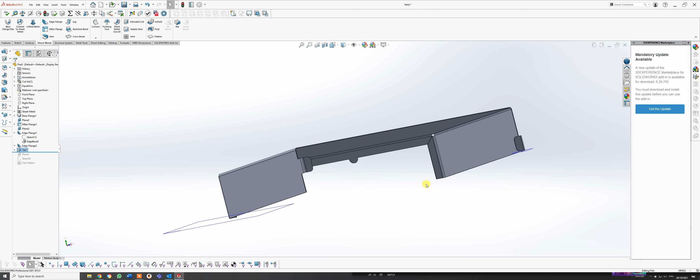Okay, we're going to talk about sheet metal today. What you see in front of you is just a very basic sheet metal process using flanges. Most sheet metal uses flanges. I know that may sound funny, but get used to using the word.

There are four basic flange types within SolidWorks, and they are your base flange, which is what you probably do most of your modelling with, your mitre flange, your edge flange, and your tab, or what we call a boss flange. Boss meaning it just extrudes it into the shape.

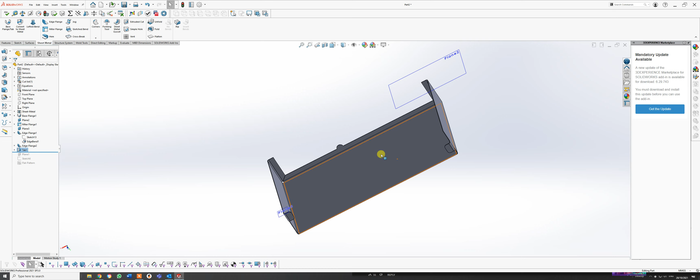So that is basically what we're going to do today. This will probably be one, maybe two exercises, but I'll just zoom in to show you what we've got.

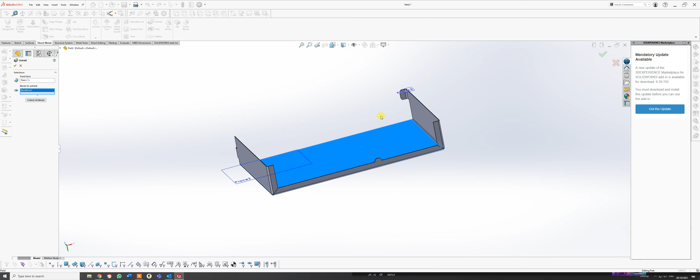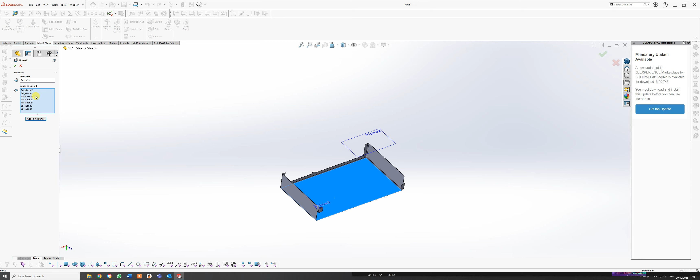I'll just unfold this, and if I just hold the face that I want to do and bends to unfold, click that one, that one, that one, and that one, and this is when it won't do it for me. I'm sure it won't, I'm just clicking all the bends on it. Let's say, I'll show you how to do this in a sec. I'll say collect all bends, and let's see if it does it. There we go, and there's my net that I can.

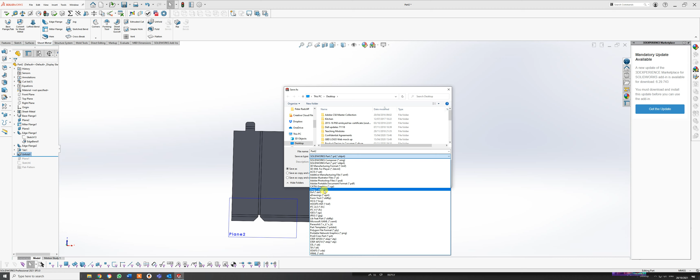As I say, this is in aluminium. I actually use it, or have used it in the past, for doing packaging, and then saving it out as a DXF file. Just go to File, Save As. There we go, onto there. And if I go down to DXF or DWG, I can then bring that in and laser cut it, and I know then that I have a precise net to actually construct it.

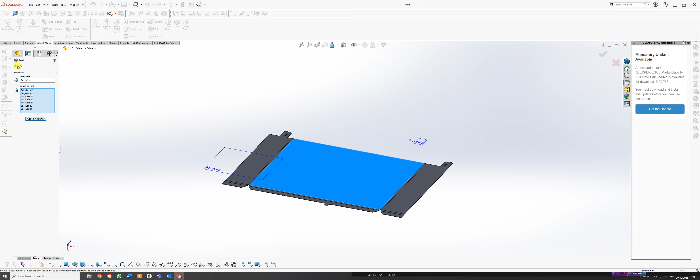And to put it back, if I just go back to fold, and I just say collect all bends, and then give it a tick, it should then fold back up to what I want to do. So sheet metal actually is quite a valuable tool, not just for doing sheet metal, you can do it for packaging as well. Okay, so what I'm going to do for this one is just show you how to do it. And I say this is very basic, and we will evolve this once you've got to grips with it.

I just point out also that you're running a higher version of SolidWorks than I am. You've got the full Monty. I have Professional, which is the next one down, which is more than enough for me. But you do have an unfold button. I think, and somebody can correct me on this, it's under the direct editing module. See, I don't have that there, so I can only use it in sheet metal.

What is interesting is I did do a champagne bottle neck cover for a local champagne producer, and I tried to use SolidWorks to do it, and I could get so far and I could unfold it, but the guys actually ended up doing it in Rhino. Although I don't think Rhino's got the unfold thing. I think in terms of Rhino, they managed to project the curve, etc. But it has its pros and cons, and it should have been able to be done in SolidWorks.

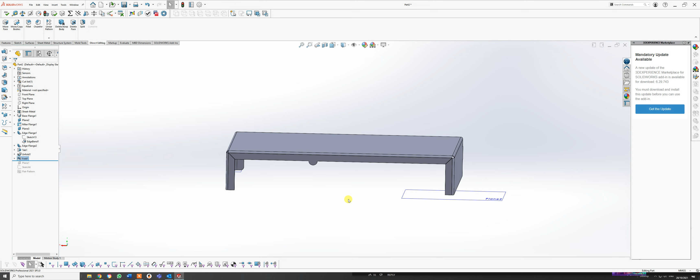But anyway, we'll move on. So to start with, what you need to do is go to File, New. I'll just check I am recording. Yes, I am. Okay, a new part as always.

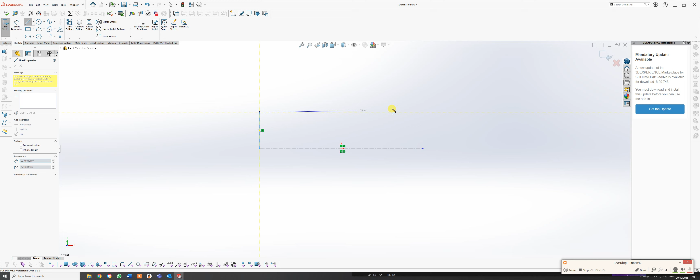I then want to draw a solid line from there up to about there, round to there, and down. Now you could do that with a rectangle tool, it's just really what floats your boat in that way. So smart dimension on here, go up to 420, okay, and the side ones at 76 in height. Okay, now let's come out of that sketch for a moment.

Or I could go straight into... what are we doing today? We're doing sheet metal, yeah, the sheet metal tab.

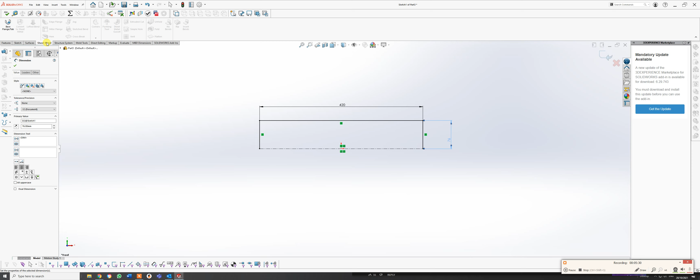And I could go to base flange, and it goes through and automatically selects the sketch that I've got, so I'm still in that sketch. Now, what's interesting here is it's gone with the parameters I've been using previously.

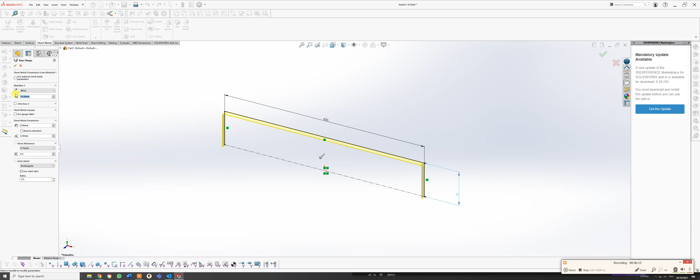But just to double check that, you need to make sure that your boxes are correct. SolidWorks has also updated a lot since I started, so some of these new bits and pieces are new to me. So with your direction 1, it needs to be blind, and you need to put a figure in there of 240 millimeters.

And you want to double check that you are using sheet metal gauge. So just click on that one there and select the table, and you want sample aluminium. Now, gauge, the thickness of metal, is measured by gauge. The higher the number, the thinner the sheet. So on that, it's default to gauge 10. You want gauge 20, and I'll give you a sheet or a table that actually equates to that, and you can preload tables for SolidWorks.

And if you ask Mark, he should hopefully go through gauges with you on that. I tend to use this, as I said before, for packaging. And that thickness of card is not in gauges, it's in GSM. But if you've got the table, you can then actually simulate the two from that.

Just to quickly go down on that, these radius here should be 3 millimeters. So you just want to change that one there to 3.

And K factor, bend allowance, it's a mathematical calculation that allows you to calculate the bend aspect. Or you can, if you take on that, you might be given a bend allowance, bend deduction, or bend calculation. But K factor is fine just for this, for the meantime. And just make sure that bend allowance is grayed out for you.

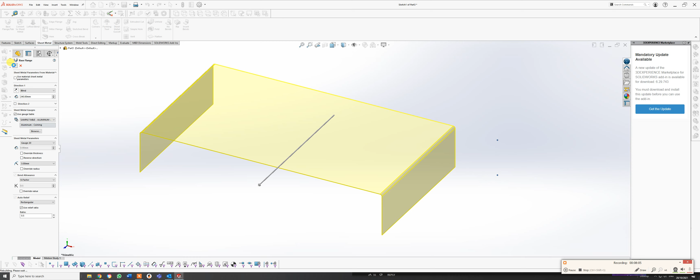So I'm going to give that a tick, because we've actually completed that, and I will then go on to, you'll see the part arrive. So that's basic sheet metal, and I've got two base flanges formed on the ends. Now what I want to do now is actually add in some flanges on these sides.

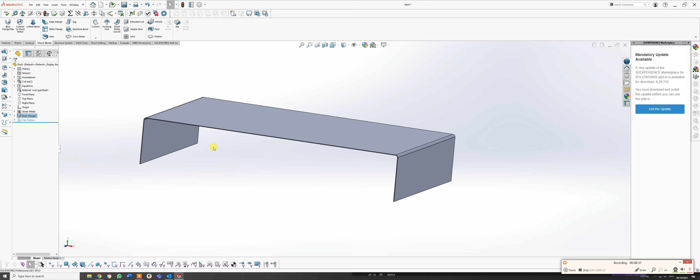Now it's quite interesting, there are different types of flanges, as I've said, but there's also different types of relief that you can have, and we've got automatic relief set up at the moment, so just leave it at that for the time being. So if you turn over

there to get into that position, and then just zoom right in to this edge here. So rather than going to sketch this time, the shortcut to do this, we go to insert, come down to sketch, okay, and then click on that line there, and you'll notice that your UCS has changed.

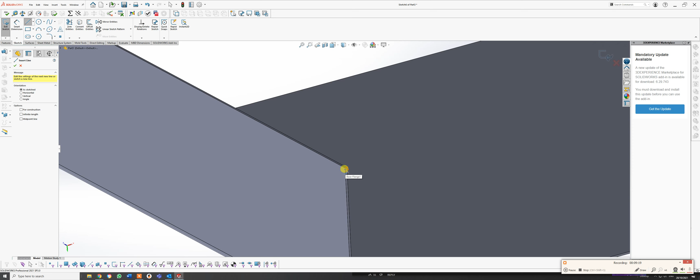So actually you're drawing in that plane there, but it's recognized it's sheet metal from those parameters. So I'm going to put in a sketch line along there, if I can find, where are we, there we are, and then let's have that at 16 millimeters, and you notice it's already defined itself apart from its length. So do that 16.

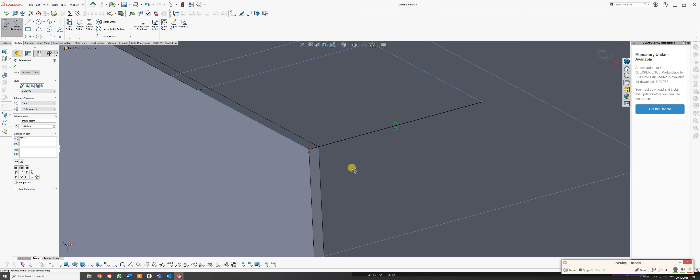Now it's important that that is on the outside, you'll see why in a second, and not on that inside area there, although you can change it about, as I'll show you. So now we've got that there, and that's at 16 mils, and it's on the outside of that vertex.

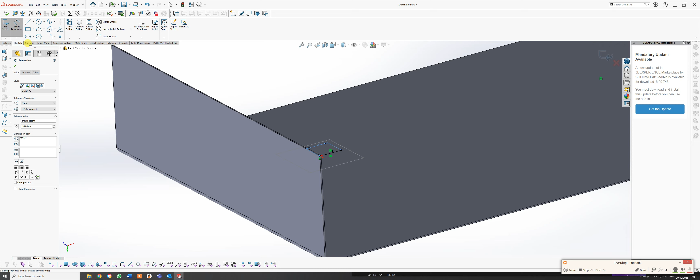Now we now want to put in what we call a mitre flange. So you can either go to insert sheet metal again, or go to sheet metal, and you'll see the highlight there, mitre flange. SolidWorks is brilliant because you just hover over and it tells you what you're going to do really. And look, automatically it's already sort of put in the flange distance there for me, and it's gone to my sort of default.

But I want to pick up some other edges and make sure that everything is correct. So flange position, this is what I said, it's important that you pick the right line, but you can change it. That's on the inside of the line we've drawn. If I had drawn it on the other one, I could have gone there, and that then goes on the outside, and then that comes inbound. So it's just important that you make sure it is in the right area.

The one thing we are doing here is actually using gauge tables, so just take that out, use gauge tables of 3mm, and start end offsets 0.

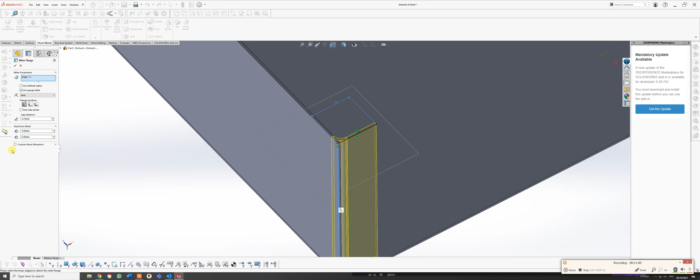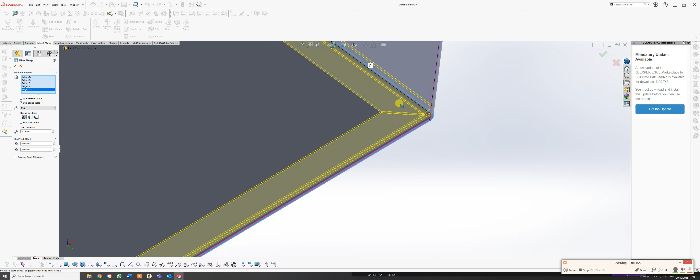What I want to do now is go and pick the other areas that I want the flange to look at, so make sure you've got the same figures as I have in that table. I'm going to pick on that line there, and automatically it has started to pick up on the flange details that I've got there. Also notice that has actually gone inbound.

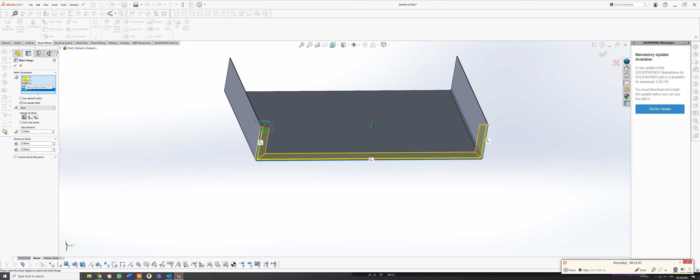I'm just double checking I've got the right one. So it's come inbound, so it's actually bent that in to those points there, as you can see. What I'm going to do now is, well, let me just come out of this and double check that we've got this.

If you look at your design tree, you'll see you've actually got what they call a cut list on there. These are different things that anyone who actually makes this knows the sort of direction and what is involved for you doing what you're doing.

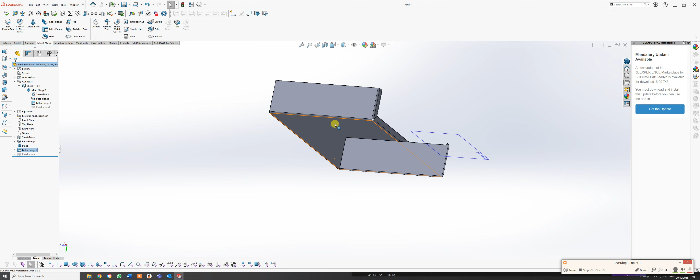What I'm going to add now is on this side, I'm going to put in an edge flange, and that's different from the mitre flange on there. So if I go up to my sheet metal tools, I go to edge flange, and it's already asking me to pick an edge. I'm going to pick that out there, and you notice straight away it's put it in, but it's going in the wrong direction.

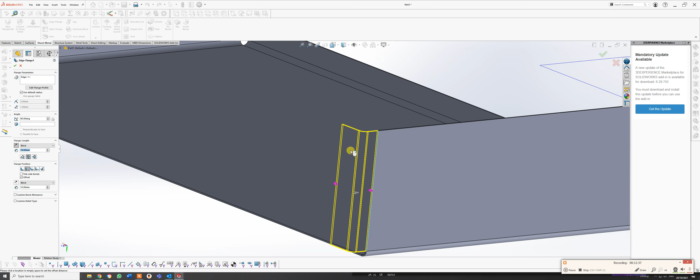So I just take that over there, and I'm going to put that in somewhere probably about 20mm, just a click, so I've actually got what I want to look at. Okay, I've actually done this on the wrong side, but it doesn't really matter for now because this is a demo.

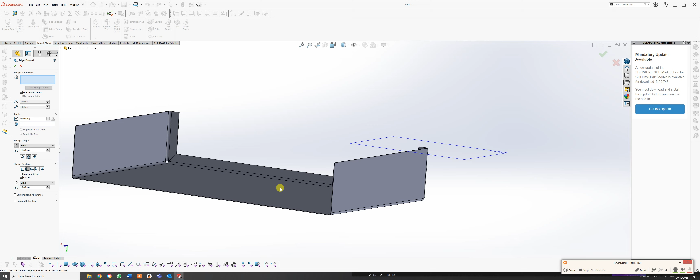I should have that on that side, but I could actually change this. So I just clear selection on that, and I go to the side I want, because I should be looking at that in that orientation. Let's just go in. I probably had it on the right one. There we go. And again, like I said, I can pick that up, take it away, or pull it where I want to. For the moment, I want that to be round about 20.

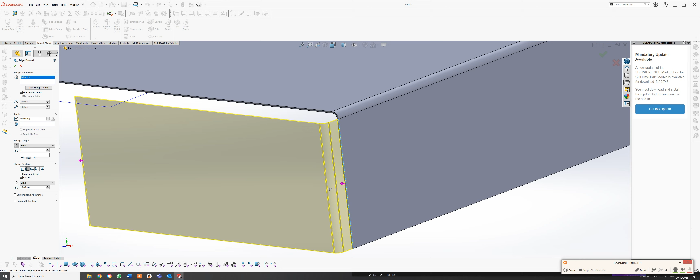Okay, I want it blind, and down here the parameters for the flange length actually will be 30 at the end of the day. So just put in 30, save time later on. And what you'll notice here this time, I've actually got the flange outside and not inside.

So if I click that, see how it goes? Well, it doesn't really go in. It's probably because we have that there position. I'm just wondering if I should actually change that. That's fair, let's just see if I can. No, I'm going to leave that. It's 10mm out, which is a little bit too much.

That's that 10mm there. Let's just see if I put in 0, see what happens. So yes, it comes inboard then. And if I just change that to there, that goes outside, so it goes back to my 10 on that. I want that there for now. It doesn't really matter at the moment, it's just showing the principle of how to position flanges.

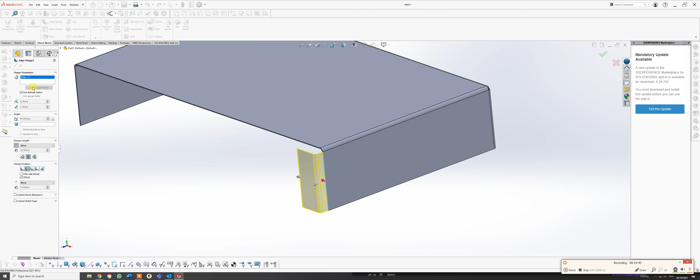So I'm okay with that, but I need to change - I don't want it at that length. I actually want to change that profile. There's a little button here saying edit flange profile, and you'll see if I just move that out of the way, it's actually created that sketch for me.

So go to Smart Dimensions. Total distance of that is 16. Okay, let's do that at 25... 25, oh, something happened there. What happened there? I missed that. Let's try and change that again.

Just double click. The dimension selected is a driven dimension. Okay, I don't know why that's come in, but that shouldn't be there. Let's just escape. Let's see if I can delete it. Yeah, it's probably because... let's just take that one off for a minute. Just can I bring that down? Yes, I can, so do that one first.

Let's go to Smart Dimension. Let's make that 25. Okay, and then let's make that 16.

Okay, and then I need to put some fillets in here of radius 6 mil, so just change that to 6. And let's just do that one, that one, that one, that one. There's 6 mil, and up here sketches - the sketch is valid, so that's good.

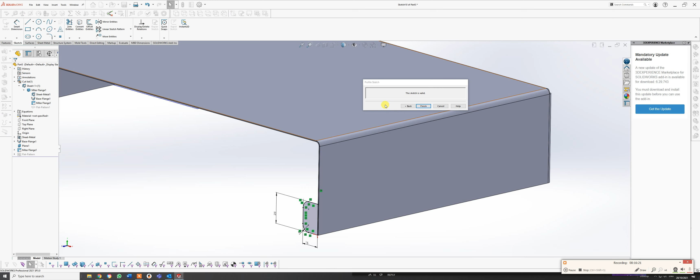And I've done all that, so I can now finish. That's just going to change that back in. So therefore I've got my little tab there. I may have to come back in and edit that gauge to where it needs to go, I'll come back to that in a minute.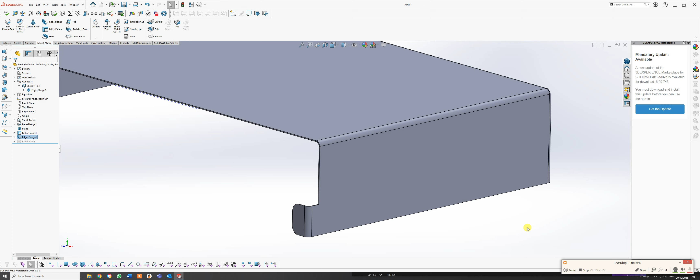Now that you've done that one, I need to put one on this opposite side here. So again, same thing - go to edge flange, I'm going to click on that outer one there, bring it this way. Okay, then I'm going to go into edit flange. And this time, okay, dimensions are...

Let's have a look at that one. So 16 again, the same, but I just want to move that up roughly to about there. Let's do Smart Dimension from that point to that point - that should be 32. And from that point to that point, I'll just put it over there for now, 25.

Okay, let's define that again. It really does matter where you put these, so let's just take that out for a minute. Let's just see if that will come down there, and let's just change that. Why I want it, let me change it. Let's try and change again. Let's go - let's just delete it for now.

And Smart Dimension again, let's do that. It's probably because I was doing that side, sorry - 25. And then let's put this one in here from there to there, and that should be, as I said before, 32. Brilliant, okay, and then again this one down there, 16.

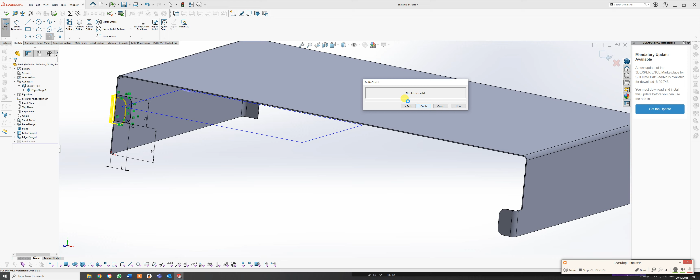Okay, now what you'll see there is these are probably sticking out a little bit too long. If I just press that to there - no, actually I'm quite happy with that at the moment. But I'm going to go back in, I'm going to edit that flange.

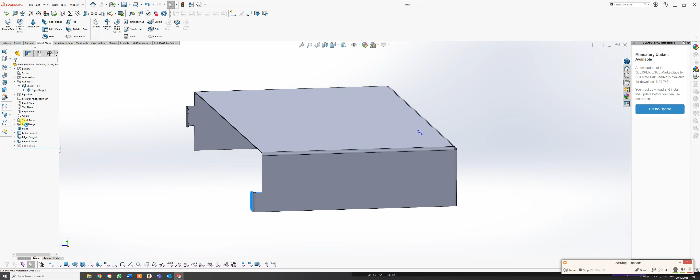So let's just see which flange - let's do that one there. And it's the same as you would do, go to edit feature. And I don't want that to take the offset off - that's better. Okay, what's that do? Okay, you see that's gone in there, which is how it was, but there was a slight cut, so that's exactly what we wanted.

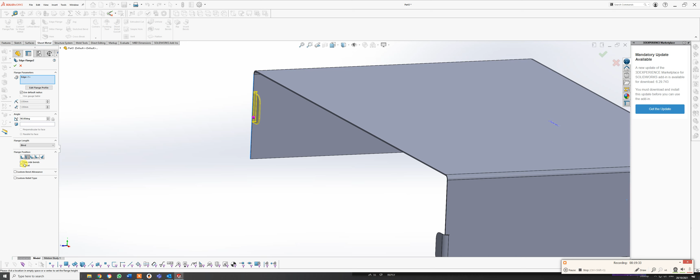And we do the same with this one - let's just see if I can do it from there. Edit feature, and let's just take the offset from there. That's fantastic. So there I have got two pieces that are stuck in, and the last thing I need to do is put a base flange in on that one there, or as some people call it.

So this time I'm going to just do this as a normal sketch menu. Go to sketch, sketch. I'm going to go onto that surface, and I'm going to draw a circle about there, and that dimension is - I forgot the dimension - I think in terms it's 16. It is 16, okay, just my notes, 16.

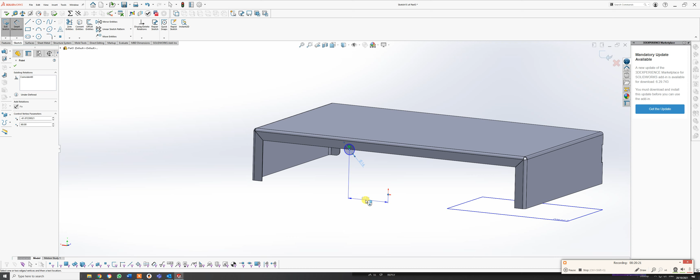Okay, and I need a measurement from there to there to get it in position, and that is 50 millimeters. Okay, and then what I will do is go to my sheet metal again and go this time.

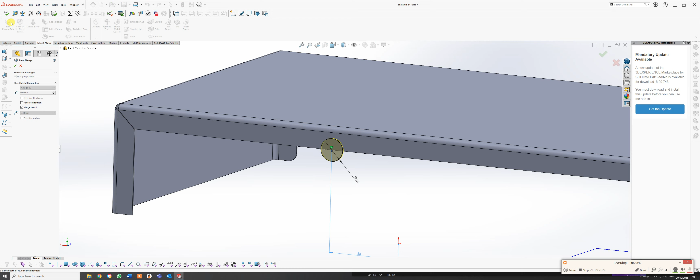Actually, it's not there - it is there, sorry, that one there. You'll notice it picks up in it automatically and extrudes it to the exact depth because I'm already using those tables, and merge result there. So I just need to give that a tick, and that's nearly it. That's that part there, so there's my little tab.

I mean, this could be something like a computer casing, or as I say, it could be packaging or whatever from it.

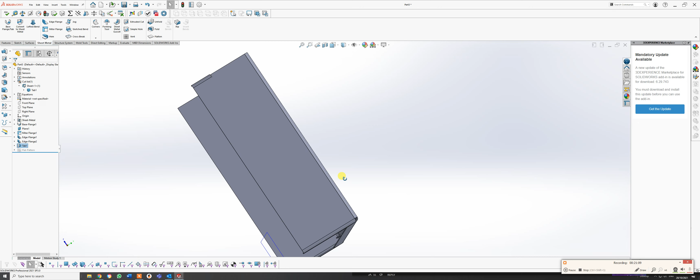So what I want to do now is use my flatten button, or unfold button, on that way, and that's quite easy to use. I'm just going to - sorry, I'm yawning, I shouldn't be yawning at my own work.

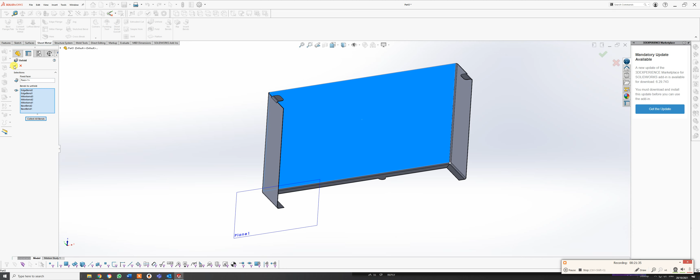God, that is bad. I go to unfold, and it's asked me for the fixed face, so this time I'm actually going to use that base, and there's a nice little key here - you don't have to do it all in one go. I'm just going to collect all bends. Okay, give it a green tick, and you'll notice in a couple of seconds I now have my net that I require, which I showed you before.

And as I said before, I can then save that out as a DXF file. I don't know if you've done DXF saved out before.

I'll just demonstrate that. Go to file, save as, because you can actually edit bits and pieces. If I just change that to DXF, that one there, you'll see options on here.

What I suggest you do when the options come up is go for version R12. You're probably on something higher, I don't know what else they've got at the moment, but I'd go for the lowest one possible because you never know what people are working with. I'd also look at document properties just to make sure you're in ISO millimeters.

One thing I do want you to look at, it's not display performance, it's curvature generation. Sometimes if that's set way low, all your curves will be faceted, so you want to put that up probably as much as you can. That is probably just about right.

Let's just see what else we've got here. I'll show you something else later on. Let's have a quick look at this one - no, okay, performance, it's the one with the circle. There's assemblies, external references, default templates, files - no, there's other bits here.

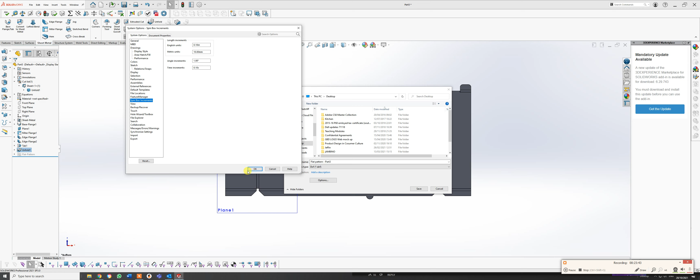Spin box - there is a way, I'll show you in a second. Let me just look at increments. That's an inch, or every 10 millimeters, so when you spin something around it will go in 10 mil increments. You can change all sorts in here, it depends how you really want to work. But always remember, what you change, you can change back, either through resets. We're just going to OK that for a moment.

So save that as a DXF. If I go to save, you'll get a dialog box up, and it should have a picture of the DXF. It's asking me about sheet metal, and geometry, so single file. Let's just see what it does, and is there going to be a box?

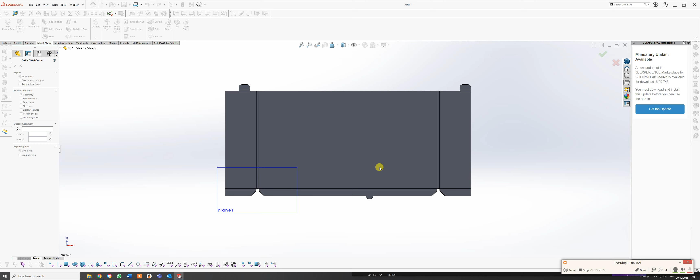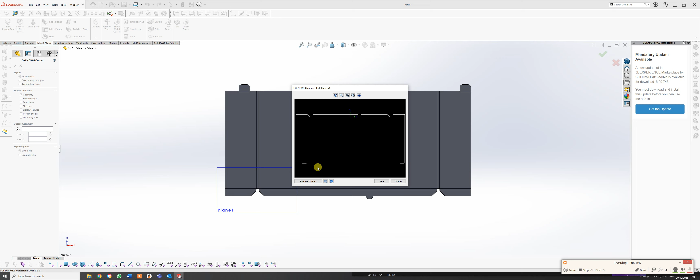So it does, just OK that. Has it saved my file? Yes, okay, this is it. What you'll notice here is it's only got the outside profile on there, because sometimes you can go in and remove entities - you click on bits and then remove entities to do it. So if you're doing it with a laser cutter, you might want to remove lines, but you might also want to put certain fold lines in and just score the edges.

Let me just cancel that, just see if I can come back in and do this once more. Let's just try faces, loops, annotation, views, see if that makes any changes. Let's just pull the window over that, see if that does it for us. It's just about playing with bits and pieces, let's see if it comes in.

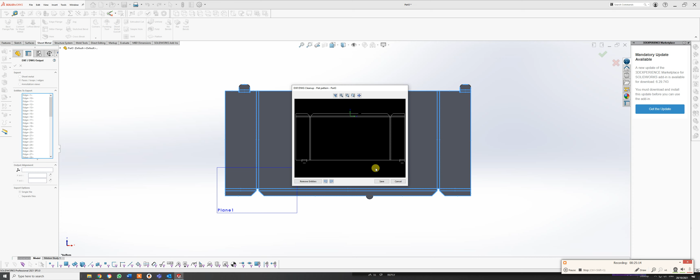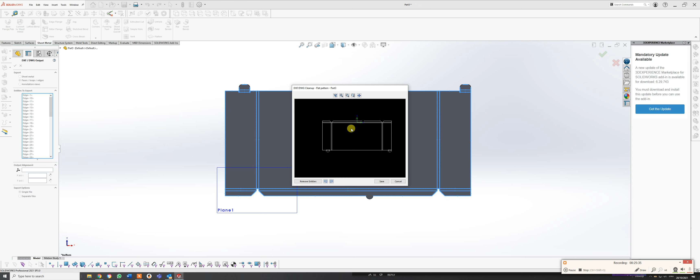Yes, there you go. So what you can do - I mean, it's lost those corners there, so you'd have to experiment a little bit, or you could draw those in if you bring it into AutoCAD or something later on. It's just a bit difficult - if you hold your wheel mouse key, you can pull it about, not the buttons on that one.

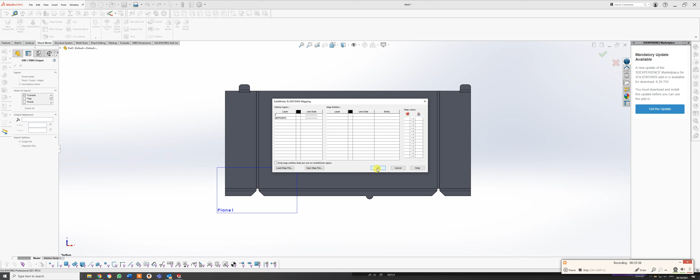Just cancel that, let's have a look at annotation views - let's do current view, see what that does. That's what you normally use when you do 3D models. Let's just OK that, see if it brings the circle in as well. Yes, that's got everything for us now.

So I suggest you do what I just did there - go to annotation views. The sheet metal is fine, but that's where you go. Let's just give that a green tick, and cancel all that for now.

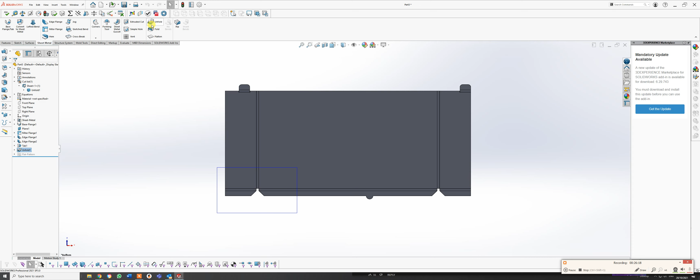What I'm going to do is go to the fold button, fold up, and just collect all bends again - it's just the opposite of what you did. And there we go, you've got your box back in there. So save that, because we are going to do some more on it.

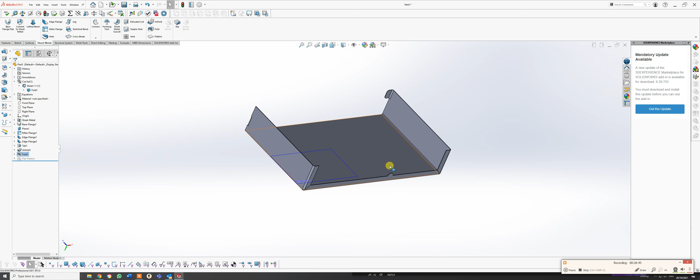I can probably give you a sheet for different relief types, for anyone who's interested, and see where we go from there. So if you come back, I'll do another video for this, just to add some additional features in there for now.